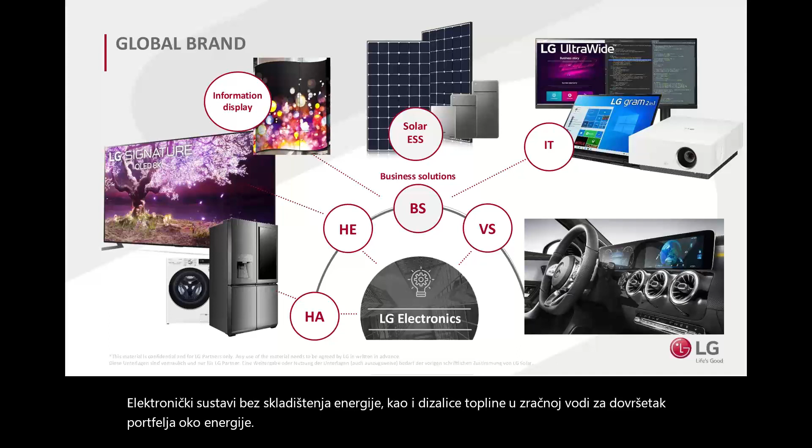And normally I'm speaking for the big German market or the Italian or UK markets. And today we are together in a bit smaller market. But small could also be very beautiful. And when you think, does it make sense to invest in solar even in Croatia? I have to say yes, of course, because you have at least 30% more sun than we have in Germany. So you will gain much more energy out of a 1 kilowatt peak installation.

And I'm not so sure about the background of all of the participants, so I will try to explain it in a way that it's graspable for you. So when we take a look at where we are today in Croatia, today we are at around 166 megawatts of installation.

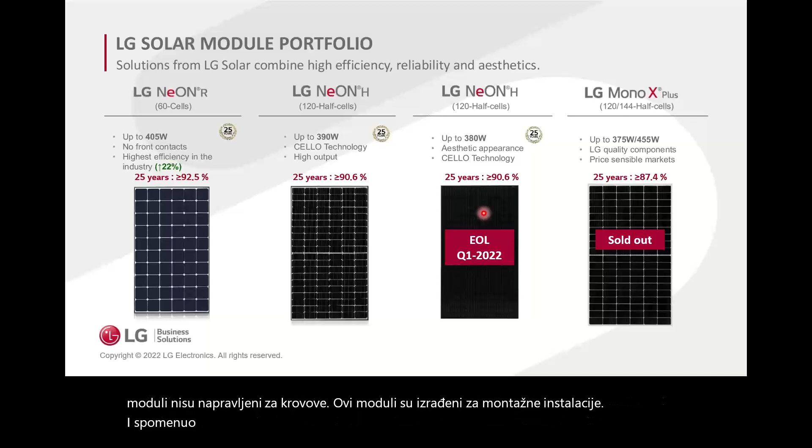And this is where we go for now. It's also NeON H, but it's NeON H plus black. So what have we done? We have used the NeON H module, put one row of double half-cut cells above, and we eliminated the space between the cells. So the little space you see here between those two half-cut cells, we eliminated them and also bring them a bit above each other to have a very smooth connection between those two cells.

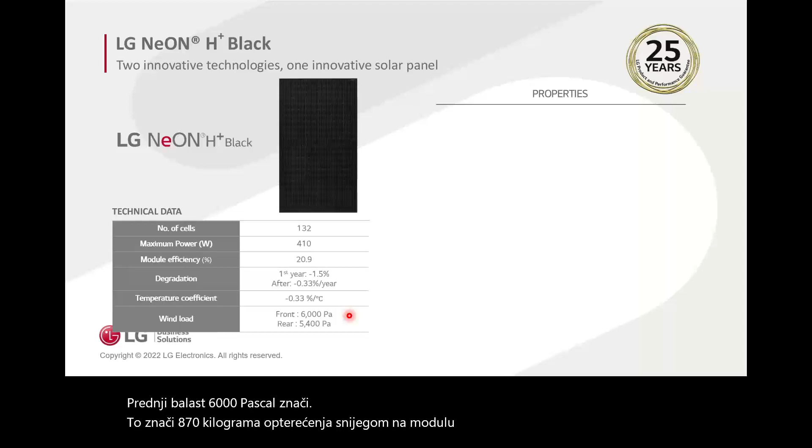In numbers, it means we have 132 cells up to 410 watt in one module, and with an outstanding warranty and technical details. So just to give you an idea what a front load of 6,000 Pascal means: that means 870 kilos of snow load on the module, and 5,400 on the back means that you can have a wind of more than 300 kilometers per hour, and it will not harm your module. I don't know about the roof, but the module will be stable.

So we have an efficiency of 20.9%. That means that you have 209 watt per square meter, to make it in a very easy way. And that means you get a lot of energy out of 1 square meter, because sometimes roofs are limited and therefore efficiency matters. I said it's a bit bigger, but 1 meter 88 on 1 meter 04 is still below 2 square meters. And due to the fact that we have thinner glass than others, but still very strong glass, our weight is below 20 kilo in that module.

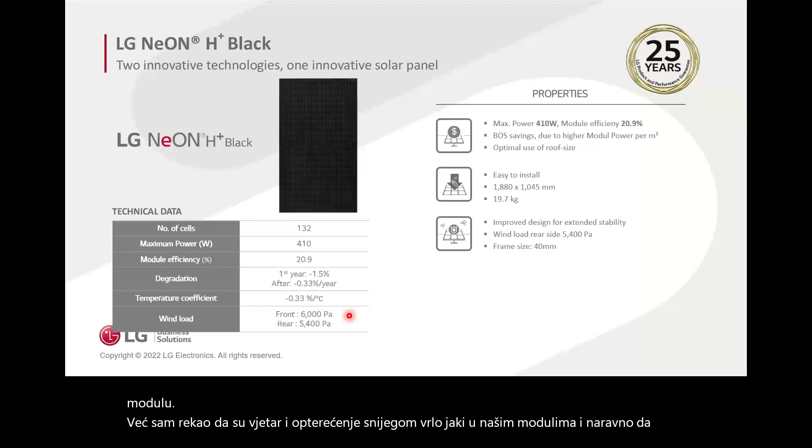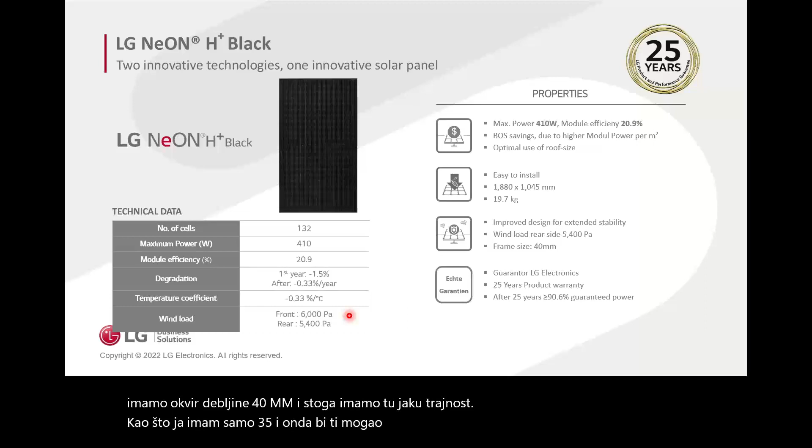I already said the wind and the snow load is very strong in our modules, and of course we have a frame that is 40 millimeter thick, and therefore we have that strong durability. Others just have 35, and then you might have a problem with snow. And the guarantor is LG Electronics, as I said in one of my earliest slides. And with the NeON H plus black, you have at least 90.6% of the initial power after 25 years.

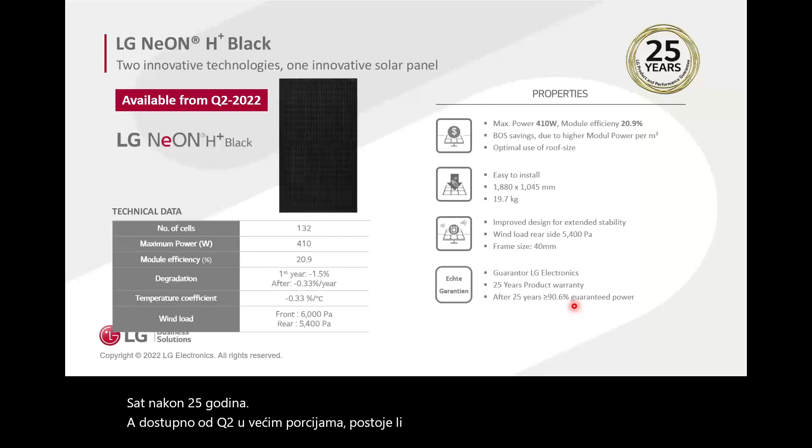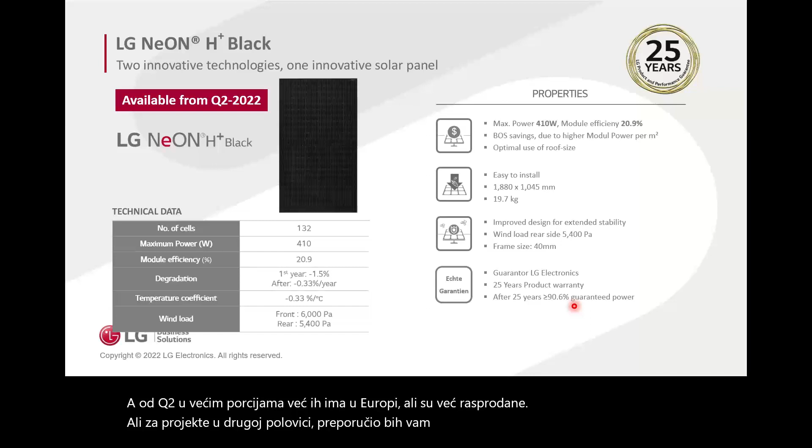And available from Q2 in bigger portions. There are already some in Europe, but they are already sold out. But for projects in the second half, I would recommend you just use the new modules. And why have we done that? I mean, elimination of spaces is always an issue to bring you more power, but it's also some work in the factory to change the manufacturing process and so on. But it's really worth it. And when you take a look at the back, it's really black.

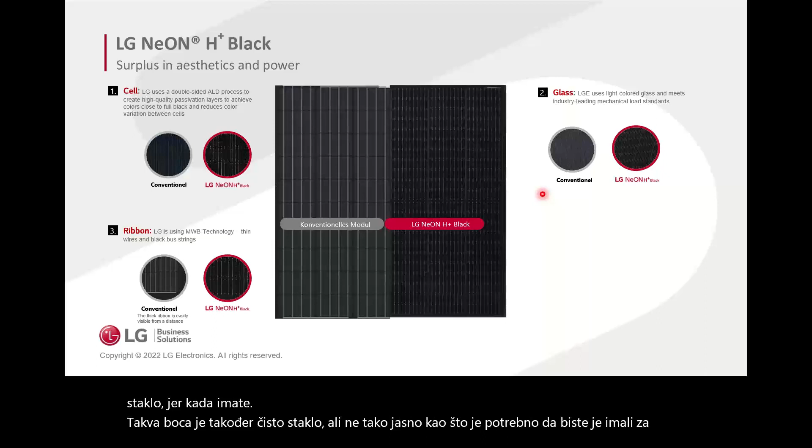That is the second effect. And for sure, we have a very nice glass. It's a very thin glass and a very, very clear glass, because when you have a bottle like that, that is also clear glass, but not as clear as you need to have it for solar modules. And of course, you also need to have a good connection between the cells. These little connection points are more or less not visible when you are 5 meters away.

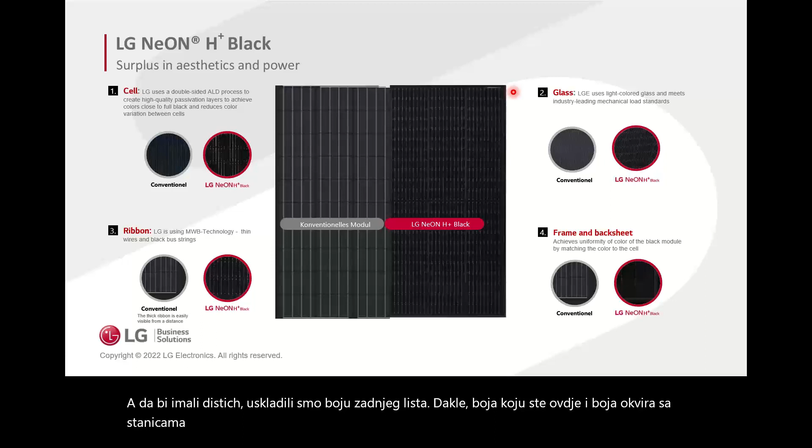So people just see a black plate or a lot of black plates on the roof, and that is what we call a very aesthetic installation. And to have it aesthetic, we matched the backsheet color, so the color you see here, and the frame color with the cells to have a very nice appearance. The same module, but with a white backsheet, and here you see where the backsheet is.

So due to the gap-free technology, you have not so much spaces, but there is still some white visible. Also, that module has a black frame, but due to the white backsheet, you have more power, because our cells are not only active on the front side, they are always bifacial. And bifacial means the back side is also producing energy if light appears.

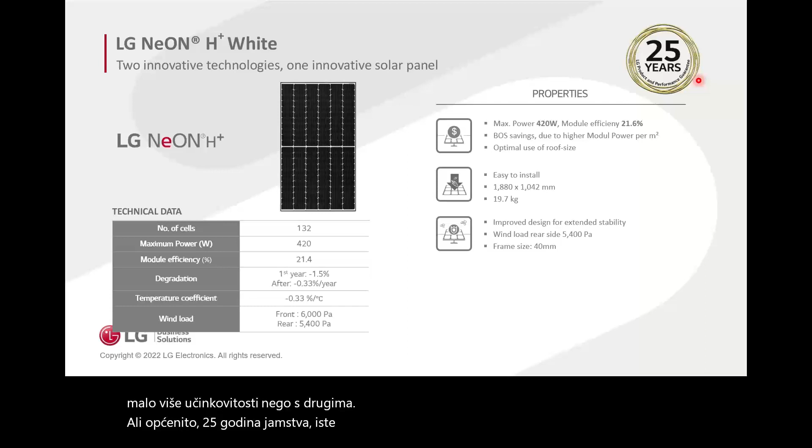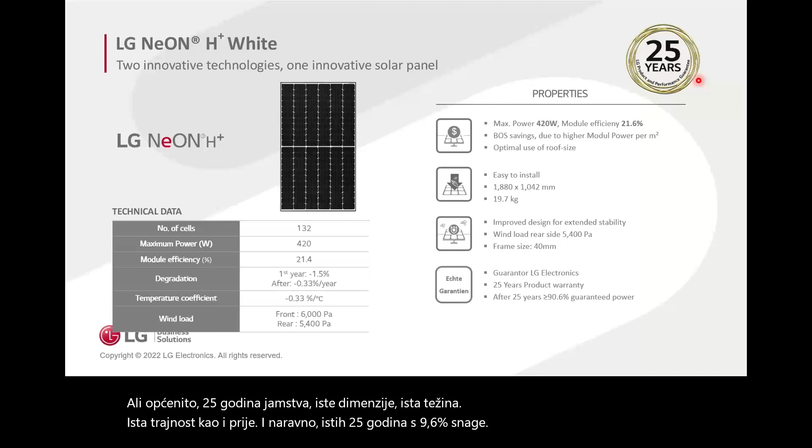But when you have a black foil, there is no reflection possible. And with the white one, you have a little bit, and therefore you are not at 410 watt, you are at 420 in maximum, and also a little bit more efficiency than with the other ones. But in general, 25 years warranty, the same dimensions, the same weight, the same durability as the one before, and of course, the same 25 years with 90.6% of power. And also available from Q2.

Sorry, I need to take some more water.

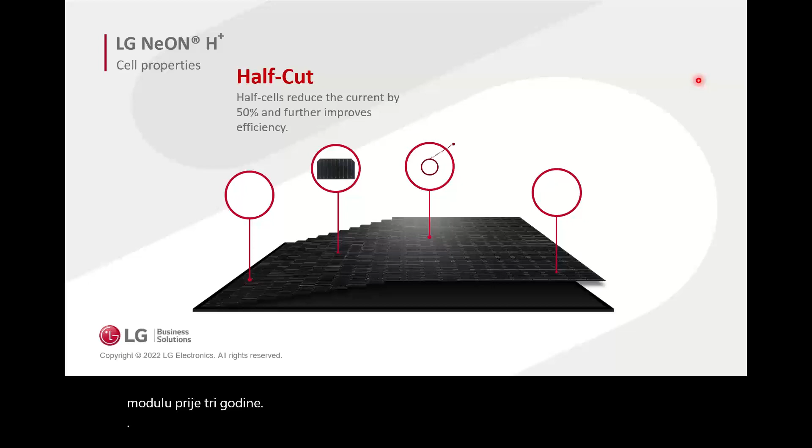And here's some more details, what we are doing here or what we have done and why. First, we have a half-cut cell. When you have the difference between a half-cut cell and a full-size cell, especially because the cells are going bigger and bigger, when you combine that here, it is, I would say, 2 or 3% bigger than the old cells we have used in that module 3 years ago. But the electricity that goes through, the power that each cell is rising, and therefore, I missed a word, you have more stress on the cell, and when you cut it, you reduce the stress.

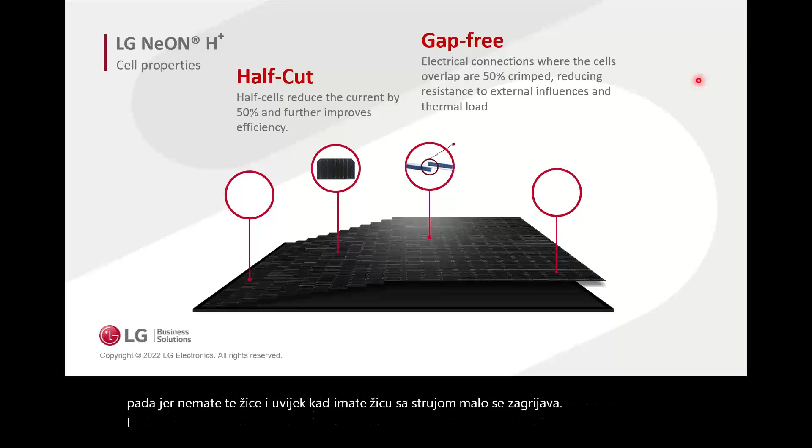And with the gap-free technology, you reduce it even more because the temperature goes a bit down. Because you don't have those wires, and always when you have a wire with electricity, it heats a little bit up. And with that overlapping connection, you have less of that, and therefore, a better electricity output. And Cello means that you have low power losses due to those wires.

In some companies, they also call it multi-wire technology, because in the past you had 5 or 6 bigger wires that were on the solar cell, and now many of the manufacturers also do the same, like we are doing for I think more than 6 years when we have introduced that technology. And last but not least, the heart. The heart of our module is the N-type cell. And it sounds maybe a bit special, because why is he saying N-type?

There's a difference between a P-type cell and an N-type cell. And the biggest difference is, first of all, the production process. So with a P-type cell, you have, I think, 9 production processes to have a finished cell. And with N-type, you have about 13. So we have 4 production steps more. But those steps are bringing more value into the cell, bringing more function into the cell. Because, as I said before, we have this dark cell appearance, and that comes from those extra processes. And what we're doing, I will tell you later.

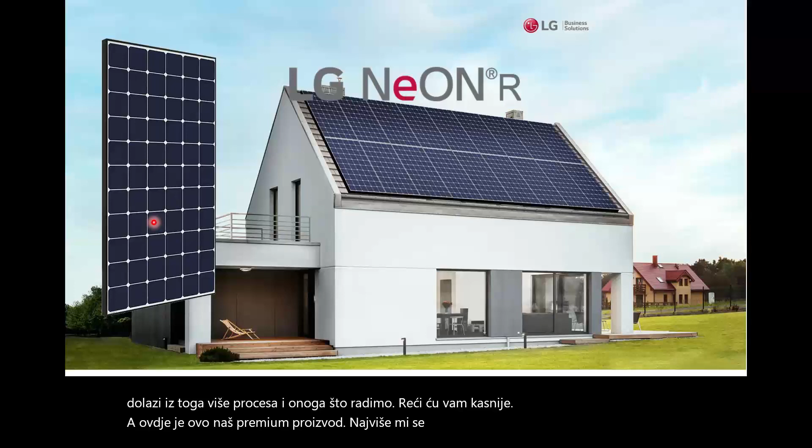And here, this is our premium product. I like it most because it has one of the highest efficiencies in the market. So you have 221 watt per square meter. Let me start again. In the past, I always said, when you have no space on the roof or just low space, use that module, because then you have the maximum power on the roof.

But today, when you see the rising electricity prices, in Germany, the prices rose from 28 euro cent up to 42 within 3 months. And when I see the news in Croatia, you are now at, I think, 13 cents for households, a bit lower, I guess, for commercial. But there are also plans to almost double it. And therefore, we have to change our mind. It's not a matter of how much power I install on the roof. Of course it is. But how much kilowatt hours I get out of my roof. And here, you have the best choice for that.

Because when the module heats up, for example, that type of module does not lose so much power as others. So here's a factor of 0.29, and the standard competitor modules are at 0.4. That means when you have 25 degrees of module temperature, the module here has 440 watts. But when the temperature goes up, the power goes down a bit.

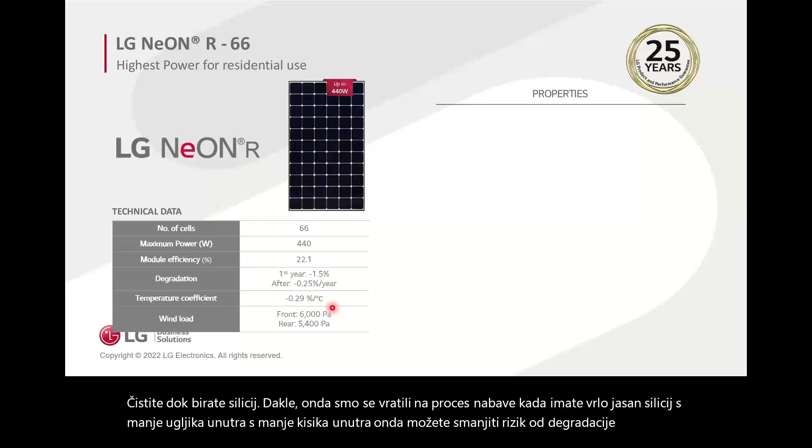And that is the standard effect you have in all silicon products, like a processor of a computer, or when your mobile gets hot, it's getting slow. It's the same effect. And as clean as you choose silicon, so then we are back at the sourcing process. When you have very clean silicon with less carbon inside, with less oxygen inside, then you can minimize the degradation risk. But therefore, the product itself must be a bit more expensive, because we choose the better basics for the product.

But also how much impact that has, I will show you a little later. So just checking the time where we are.

Okay. That module, 440 watt, I said it before, 22.1% efficiency. That module is a bit bigger because you still have the gaps here. Because we have a full cell, and what you don't see here, but on another slide, is how the cells are connected, and then you will know why we have those gaps. But also here, same durability, stability as the modules we have shown before.

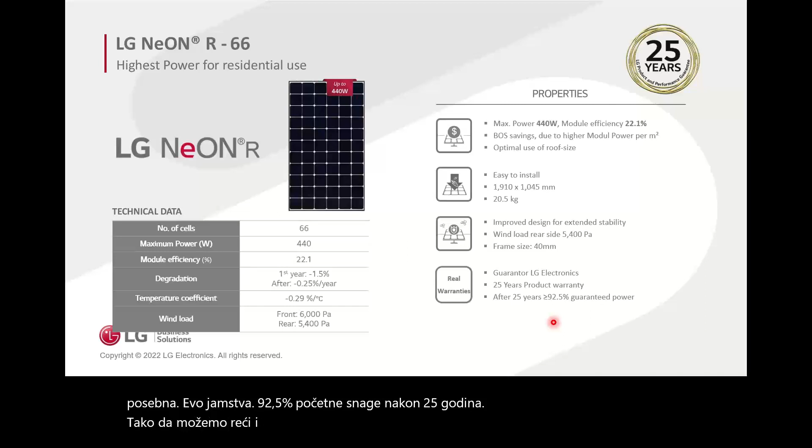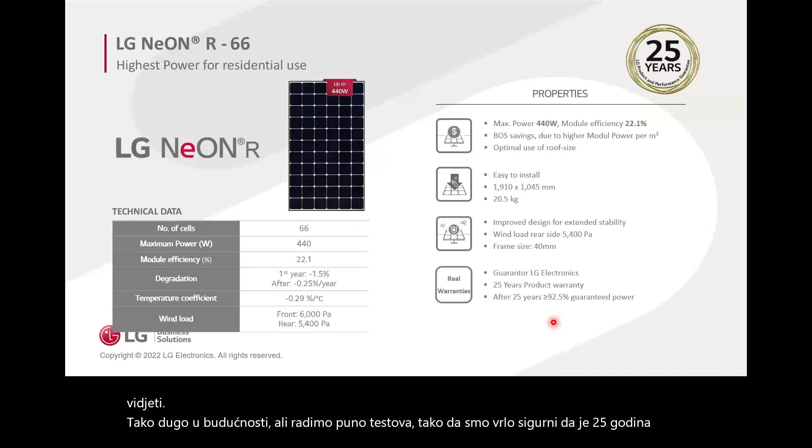But here, the very special here is the warranty, 92.5% of initial power after 25 years. So we also could say maybe 30 years or 40 years with 85%, but nobody could see so long in the future. But we do a lot of tests, so we are very sure that 25 years at least our modules will work, and that is what we guarantee with our whole company. And also that big module is available the second quarter.

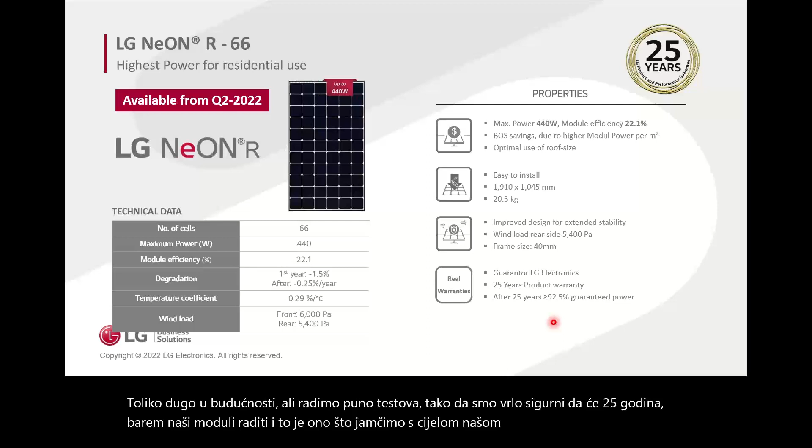Temperature coefficient, I said it before. So all modules lose a bit, and that is how it impacts the power of the module. So when we start both modules at 440 watts on a hot summer day, our module still is producing 376 watt, and the competitor module only 363 watt. So that means 13 watt or 4% less. And that is just because of the difference in the temperature coefficient.

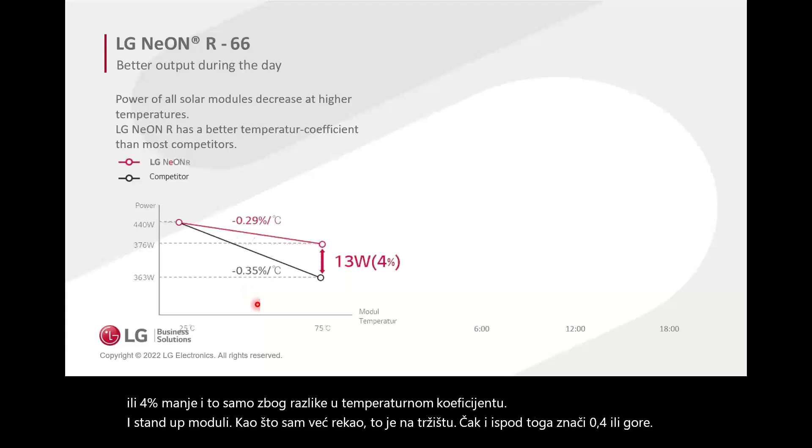And standard modules, as I said before, that are on the market are even below. That means 0.4 or worse. And then you gain more than just 4%. But that is module power. So it doesn't mean energy. But in terms of energy, when you have 75 degrees module temperature, that is the standard summer temperature when you are in July or August, that means during the whole day you're producing more energy, and on that summer days that means 2.8% more kilowatt hours. And I said before, kilowatt hours are getting more expensive, so your savings are even bigger.

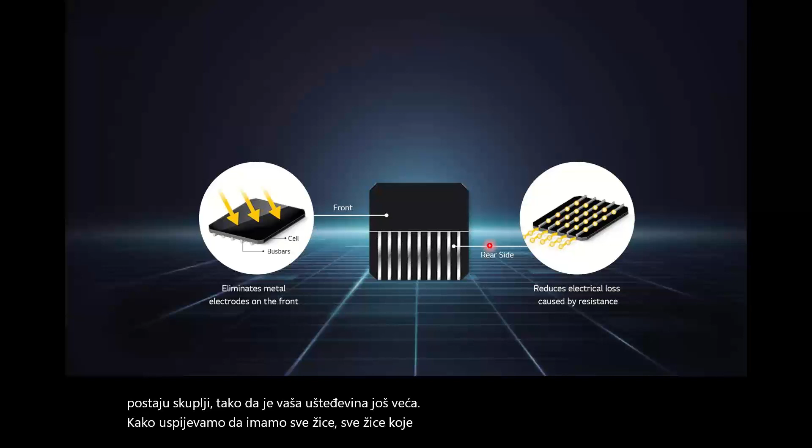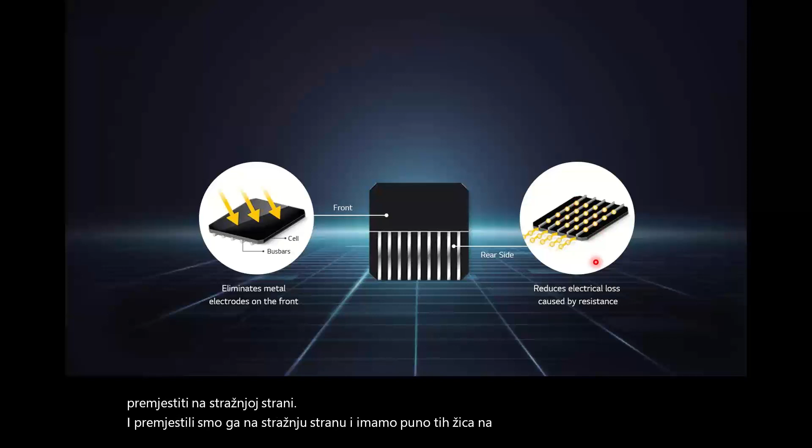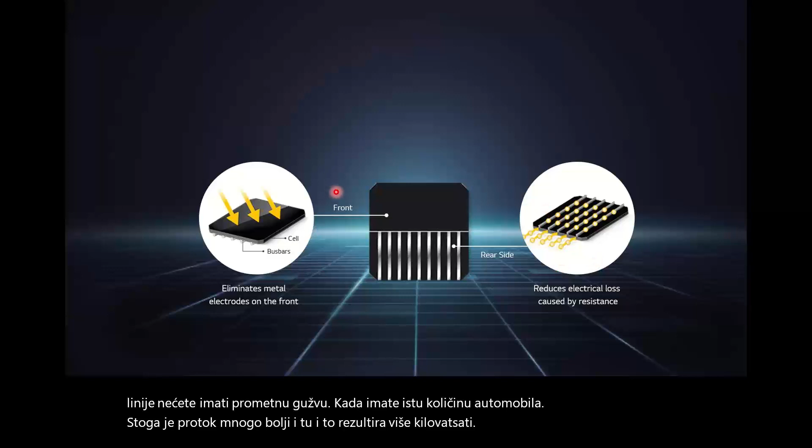How we manage that? We have all the wires, all the connection wires you see here, those yellow wires. We have moved them on the backside, and we have a lot of those wires on the backside. And therefore, we were able to reduce electrical losses, because when you think on a motorway, on a highway, and you have a traffic jam with 2 lanes, when you use 4 lanes, you will not have a traffic jam when you have the same amount of cars. So therefore, the flow is much better, and that results in more kilowatt hours. And also the appearance is very nice.

Sometimes people say, okay, that module is a bit more expensive, but it's really worth to check it. So what I always suggest my installers, when I speak with installers, I always say to them, okay, don't use that module as a joker when somebody is asking, do you have something special? Show that module as a standard, because when you have shown the customer one of the best modules on the market, you explain everything very well, and then you say, okay, and from the same company you also could get that module, is a bit less in power, but therefore it's also a bit lower in the price. Most of the customers want to have the more expensive module.

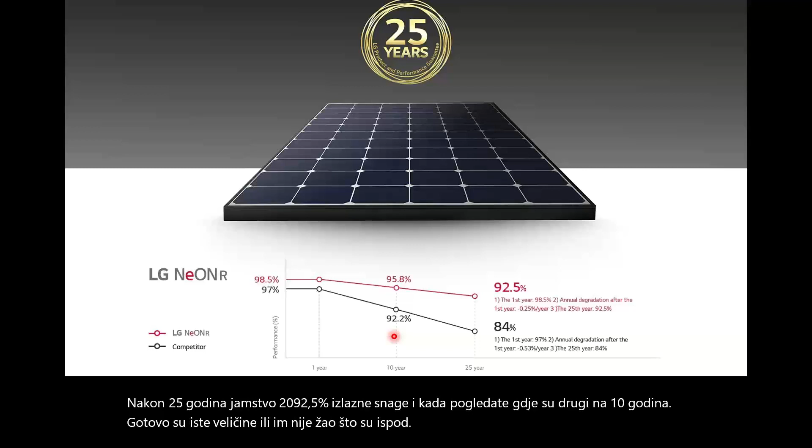And this is my main argument. Well, the main argument after the brand is just look what you get after 25 years. After 25 years, we warranty 92.5% of output power. And when you take a look where others are at 10 years, they are almost at the same size, or no, sorry, they are below. Yeah? So our module has more power after 25 years than others after 10. And therefore, it's worth to spend some more money.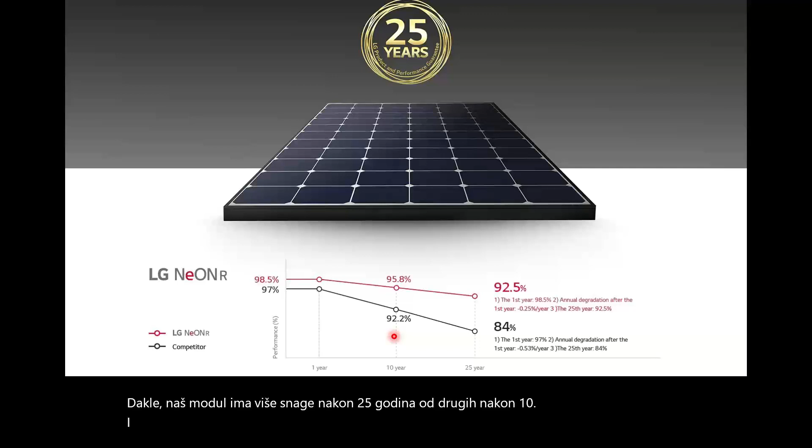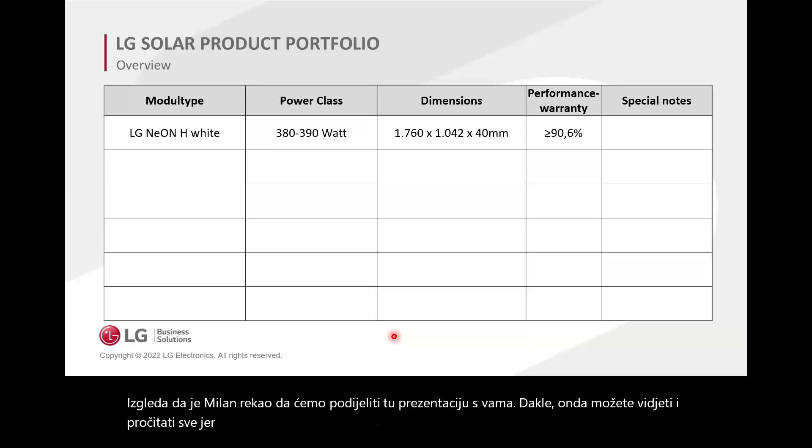Here I will go through very quick. It's an overview. I guess Milan said that we will share that presentation with you, so then you can read everything, because all of you can read, so I don't need to do that for you. But here is the main difference, what I want to show. The Neon H Black in the current version is at 1 meter and 76 centimeters, and we have now 12 centimeters more, but therefore also some more power.

And same with the Neon H white. Oh, sorry, here was white and with the black. And also the Neon R, because we added another row of cells, is a bit bigger than before. So before it was that size, and now we are at 1 meter 91. This is everything from the portfolio in general.

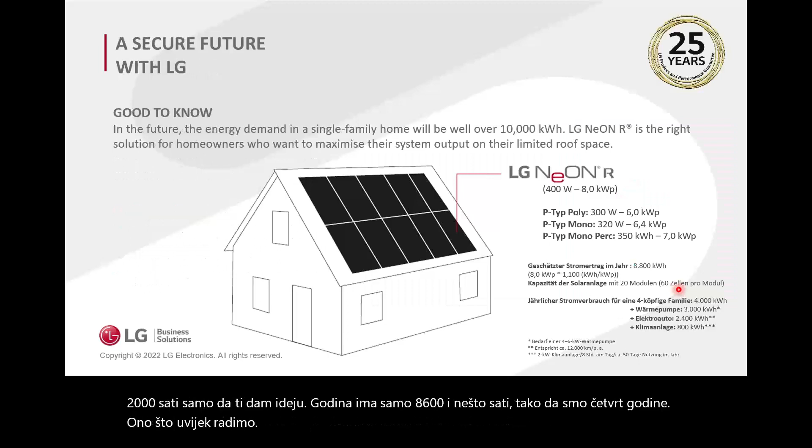And 2,000 hours, just to give you an idea, the year only has 8,600 and something hours. So a quarter of a year, what we do always. And with the NeON R, as I said before, you gain more power. You take more kilowatt hours out of the kilowatt you are installing. And due to the high efficiency, so due to the fact that you get more power per square meter on your roof, you could install more power and therefore get more energy out.

Sorry for the German here, but the difference could be big. When you see here, 400 watt module, 20 pieces, means 8 kilowatts. On the same roof area, when we go for a P-type mono PERC, that is one of the standard modules on the market, you just get 7 kilowatts installed on the same space. And efficiency matters because you gain more kilowatt hours in general out of our modules, but additionally when you have more installed power. And you might say, okay, today I have just 3,000, 4,000 kilowatt hours in my house that I'm using, or my customer has it, but you need to think of the future.

Even in Croatia, all sectors will go for renewables, all sectors. I mean, not just the electricity for households, but also the mobility sector and the heating sector. So when you think, maybe we have to install a heat pump, an air-water heat pump in the house, you have additional need for electricity. Then you have an electric car in the next few years. You have additional need for electricity.

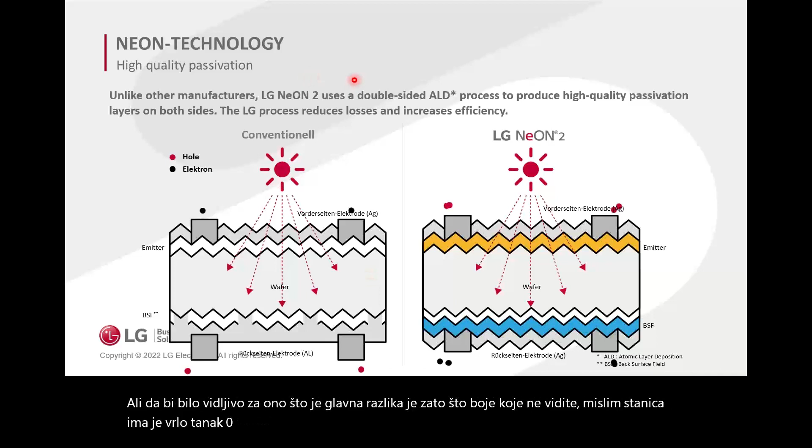But then on the back side, you need to do the same. And on the back side, most companies said, well, we don't care. At LG, we have bifacial. You remember, we also gain electricity from the back side. Therefore, we also use silver at the back side and not aluminum as most companies do. And inside the cell, we have more processes, I said 4 processes more, and with those processes we gain those extra layers inside.

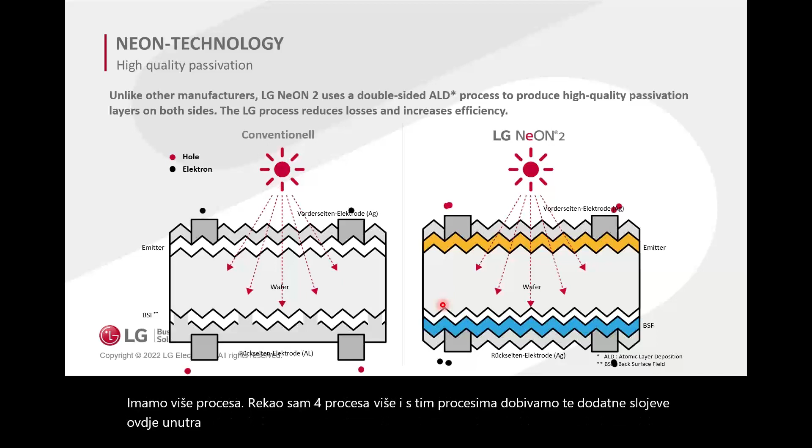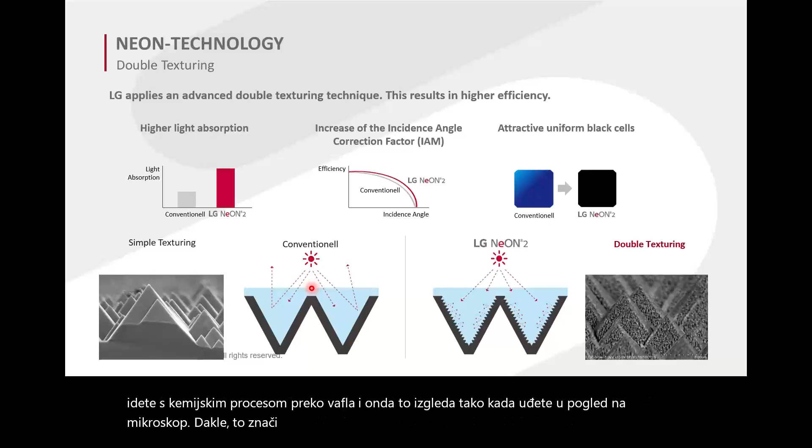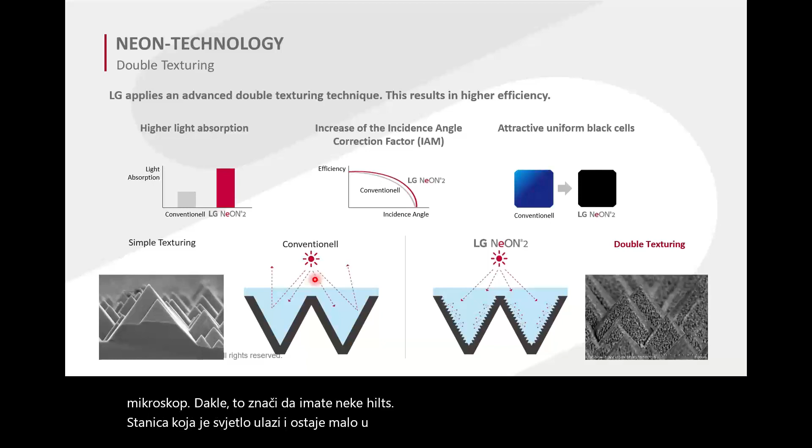Those extra layers bring us, first of all, a uniform black. Because when you have that gray plate, the wafer, you have to do a texturing. You go with a chemical process over the wafer, and in a microscope view it has some hills, so the light comes in and stays a little bit in the cell. We do that process 2 times. So we have a double texturing, and when the light comes into our cell, it doesn't find a way out, and then it looks very, very dark. That has an additional effect, because the light spectrum we can use is bigger, and therefore we gain more electricity out of our modules.

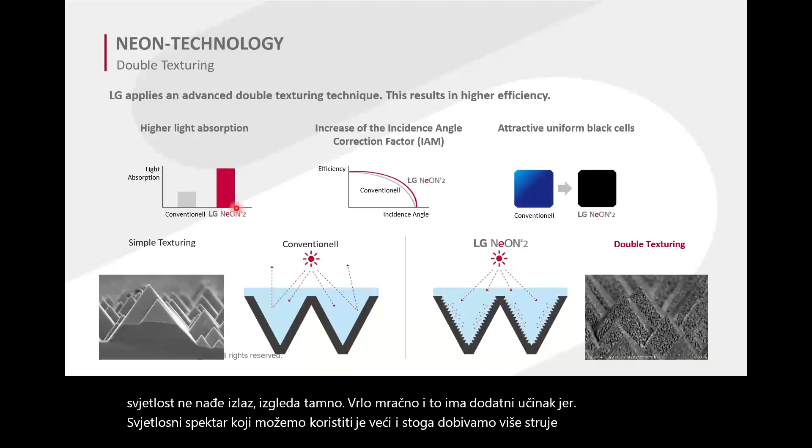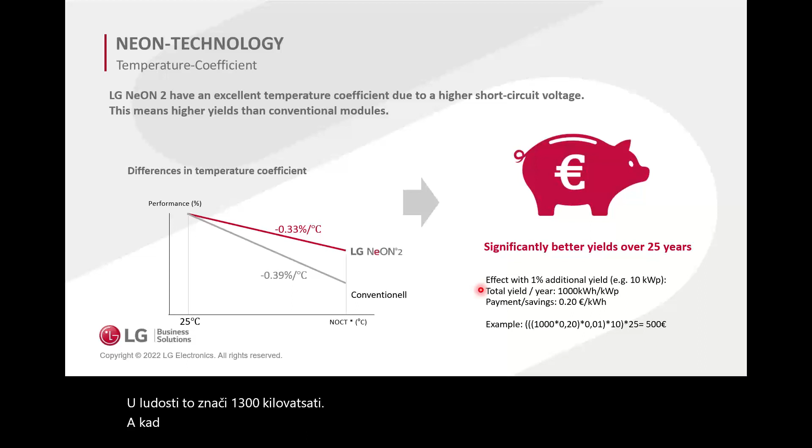And when you multiply that, you have a lot of kilowatt hours during 25 years. And that also means a lot more money. Maybe it's not 500, maybe in Croatia it is maybe 300, but it's still an additional amount you could get out of our modules.

And I said before, our warranty is better than others. So during 25 years, we say our module power does not go down as others do. So we limit it to 90.6% in the Neon H Plus series or Neon H, and 92.5 at the Neon R. And when you compare that with 84% of a competitor module, which is really a standard, 85%, 84%, that is what you normally get as a warranty after 25 years,

performance warranty. But imagine when you have just 12 or 15 years of product warranty and your junction box goes down, sorry, then you don't have any energy and you don't have any performance warranty or any warranty that covers that. So you're very safe when you use LG modules, 25 years, and nothing could happen. So you could sleep really well when you sell our modules.

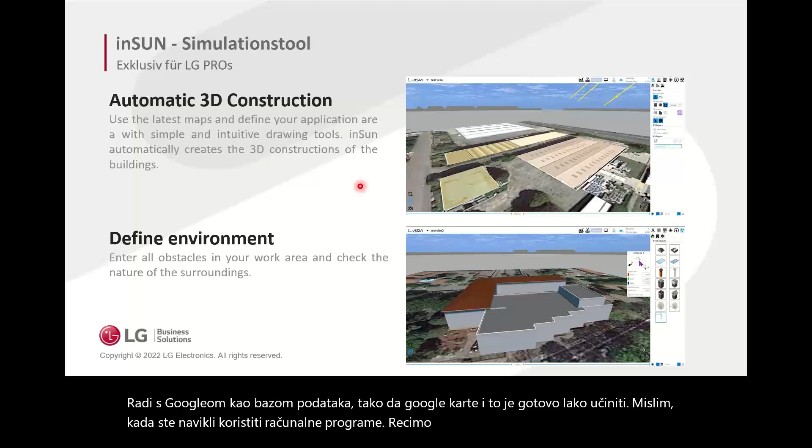inSun is a 3D simulation tool. It works with Google as database, so Google Maps, and it's almost easy to do it. I mean, when you are used to computer programs, let's say, when you are very familiar with Word or Excel and so on, you will also manage that. So I would guess the first simulation will take you 1 hour, 1 hour 15 or something like that. But when you have done the fourth or fifth one, it's between 30 minutes, 45 minutes. It depends on the complexity of the system.

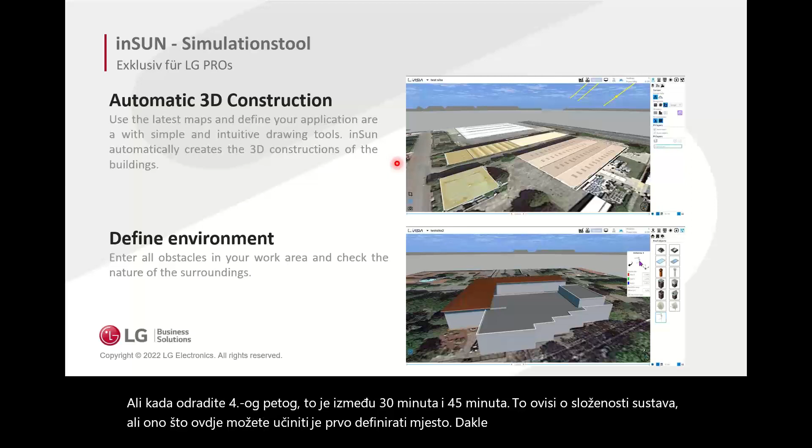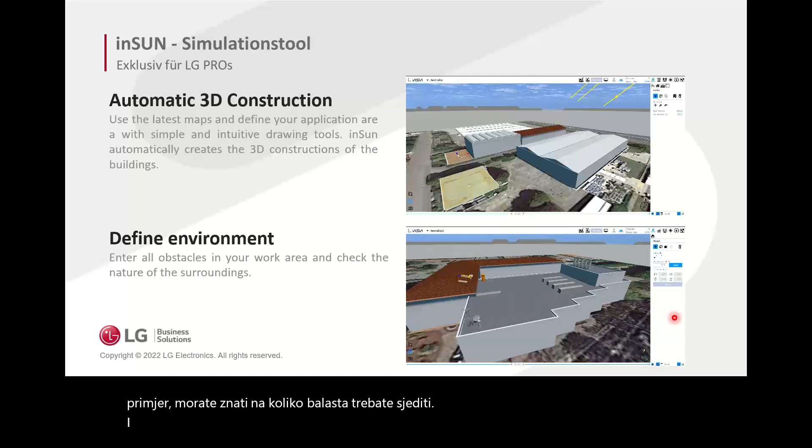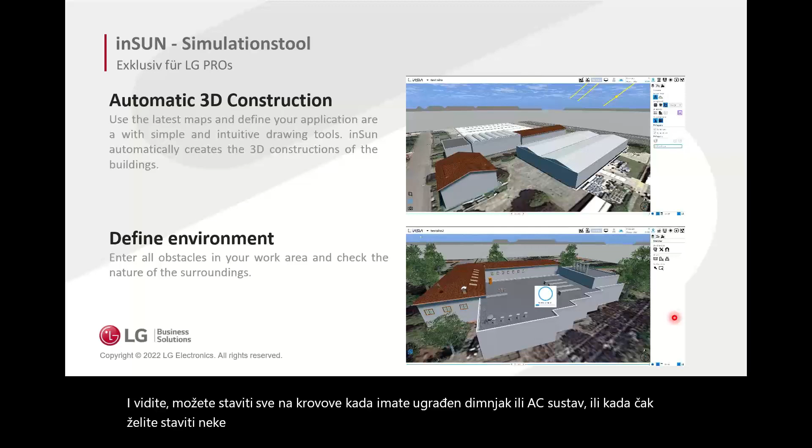But what you can do here is, first you define the place. So you search your address at Google Maps inside the program here. Then you grab a little piece out of that. Then you define the surroundings and you define the building. How high is the building? Because when you have a flat roof system, for example, you need to know how much ballast you need to set on. And you see, you could place everything on roofs when you have a chimney or an AC system installed, or when you even want to put some windows inside. So it's a full 3D planning program.

And when you have defined the building, you check how the sun is going. And the yellow lines here are the horizon changing during the year, month, and time.

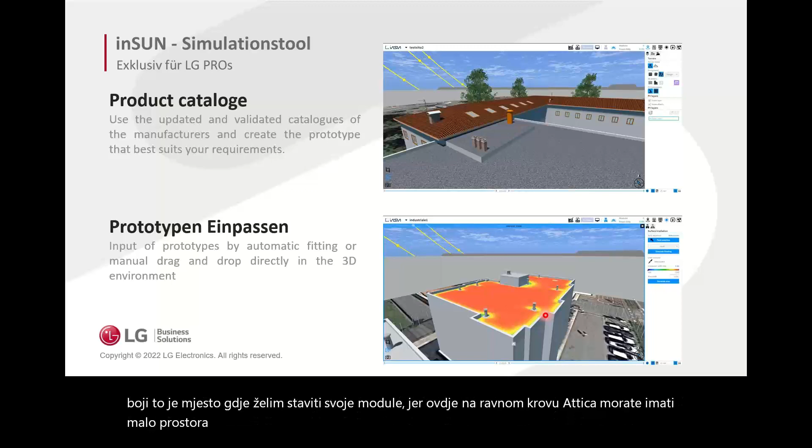And when you have chosen the size or the place, you have defined the size, and then you say, okay, here in red, that is the place where I want to put my modules on. Because here on the flat roof, the Attica, you have to have some space between, not just because of the shadow, also because of the weight. You define that, and then you can do an automatic module placement.

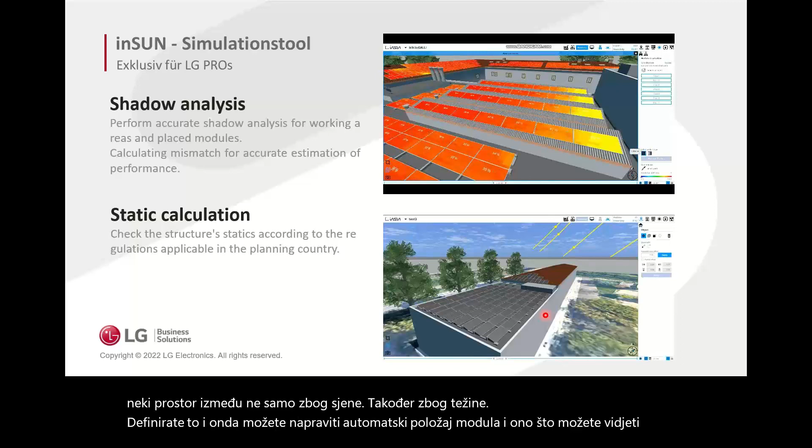And what you can see here is a shadow analysis. So the program checks with a database where is the sun at which time and how the surroundings have an impact. So here you have a higher building on the right, and therefore you have a little bit of shadow on those few modules.

And the program also checks if it's a big shadow, so does it have an impact during the whole year or just within 2 months or so, and then you can just click on the module and delete it if you don't want to have that. So this is the shadow simulation, and this is how it could look like.

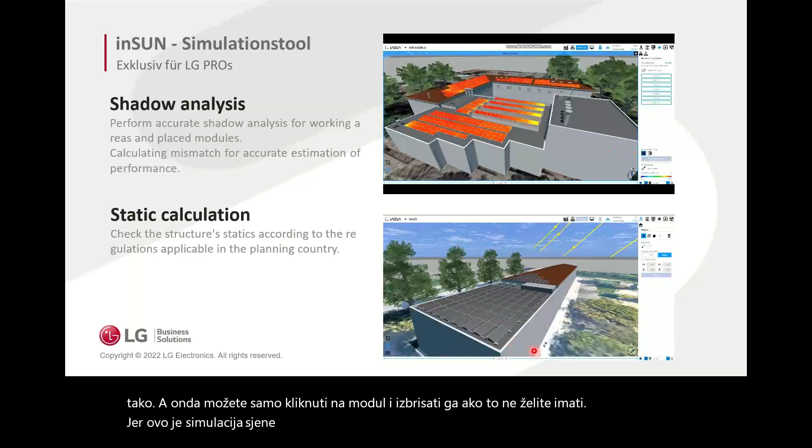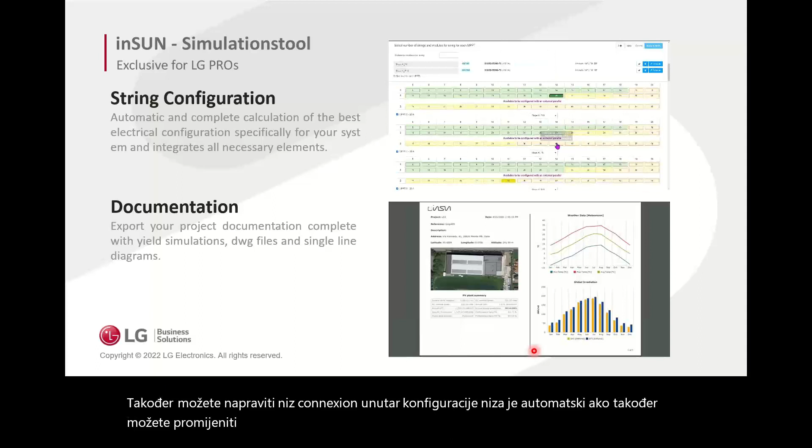And you also can do the string connection inside. The string configuration is automatic, if you like. You also could change everything you want. You have a couple of inverters inside.

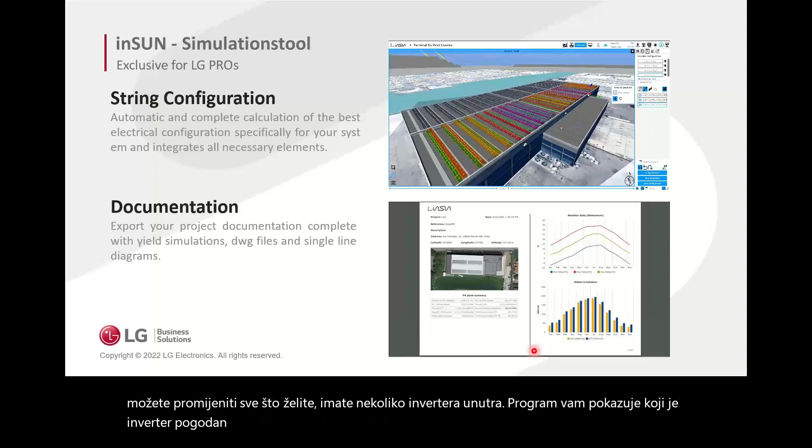The program shows you which inverter is suitable for the system or which string combination is suitable for the system, and then you just choose which one you want, and then you see on the picture how colorful it comes, because each color means one string.

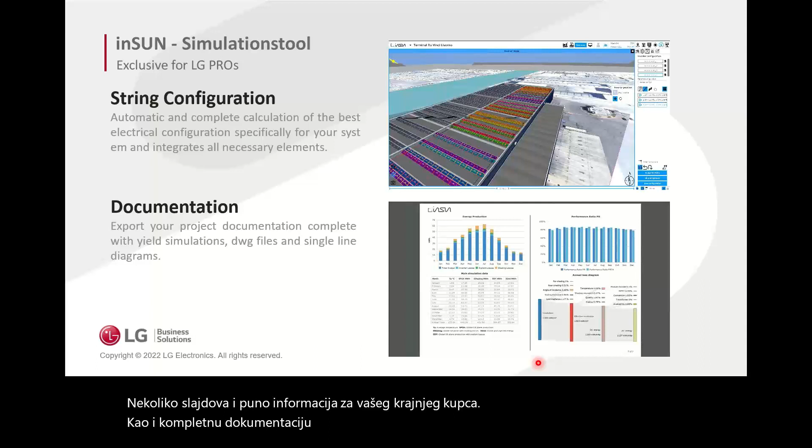And in the end, we have a very nice documentation sheet with several slides and a lot of information for your end customer, as well as a complete documentation of things that you need to have inside. And also it does a single line diagram, for example.

Also some nice features. At the end of the program, you can do 2 things, and one of them is very special, designed for LG. For sure, you can put self-consumption inside, so that you know how much of the energy you are producing you could consume at the building. And you could also calculate the return on invest, because you have a place where you put all the costs inside, and then you compare the investment with the outcome, and then you have a return.

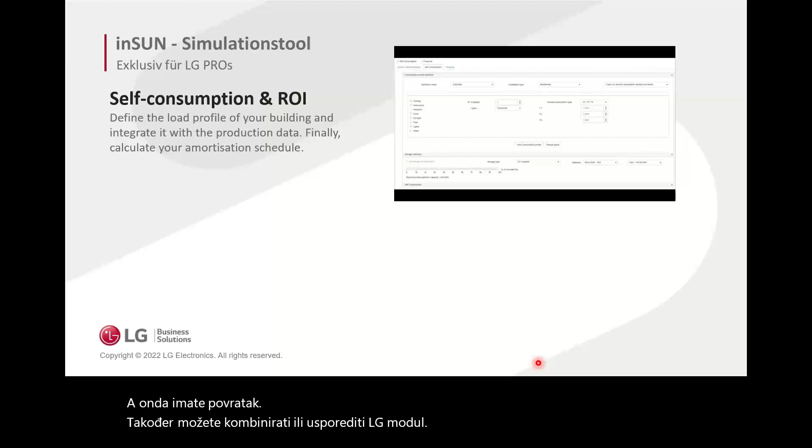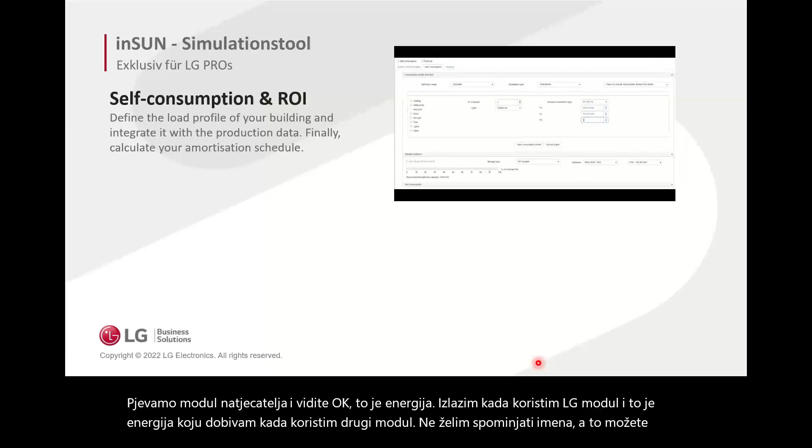And you also could compare an LG module with a competitor module. And you see, okay, that is the energy I get out when I use the LG module, and that is the energy I get out when I use another module. I don't want to mention any names. And you also could print that out, and that is something that you have here, also with very nice graphics inside.

And yeah, the good thing in the program for you is, first of all, it is free of charge. So when you don't need any support, you have no single costs. When you are an LG Pro partner, you get the support for free and some extra features. And it is cloud-based. So therefore you can use it from each computer, I think also with a tablet, I'm not 100% sure, but from each computer, from each web browser, Chrome, Firefox, or Microsoft Edge.

And you also could have more accounts with one company. So you can work on the same project with different people, not at the same time, but everybody on their own computer, because the most common programs are installed on the computer. So you need to have a strong machine that is able to do those 3D calculations, shading calculations, and sometimes it takes 10 minutes to wait for the result of the shading analysis.